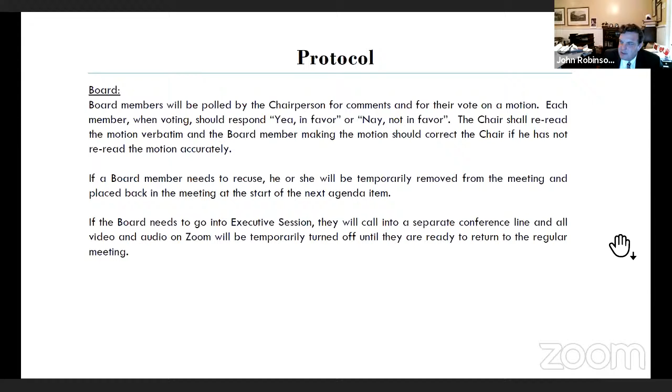Ms. Parish, what is agenda item number 1 this evening? Thank you, Mr. Chair. The first item is the request for the first one-year extension of approval for demolition of a rear warehouse building. This was originally granted on February 26, 2020, and the extension is pursuant to Article 9, Section 54962 of the zoning ordinance. Project is in the Cannonborough-Elliotborough neighborhood and in the Old and Historic District.

Okay, the staff comment. This is a vested right first-year extension requiring automatic board approval if submitted in a timely manner, which is good for 1 year and may be renewed 4 more times in 1-year increments per ordinance section 54962. We recommend approval of a first 1-year extension of the approval for demolition to expire February 26, 2023.

Thank you, Ms. Parish. This one's pretty straightforward. I have a motion from a board member. Move to approve. I'll second that. There's been a motion to approve the 1-year extension in conformity with Article 9, Section 54-962 of the zoning ordinance.

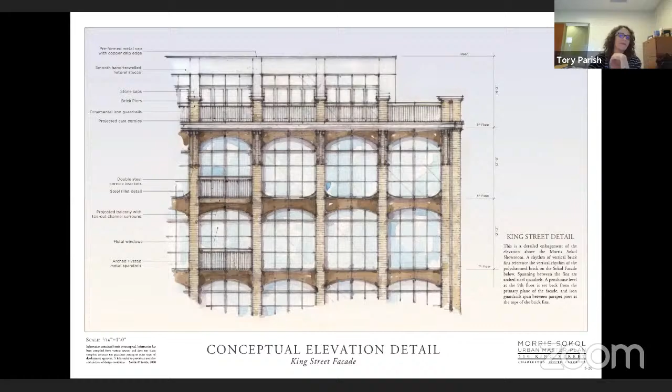Okay, all right, thank you, this is very much vested. Did you get all that? I did. It was quick, but it was very interesting.

All right, this is a vested right, first year extension requiring automatic board approval if submitted in a timely manner, which is good for 1 year and may be renewed 4 more times in 1-year increments per ordinance section 54962. We recommend approval of a first 1-year extension of approval for demolition. I'm going to read this, don't look at the screen. This is approval for a first 1-year extension of the conceptual approval, which will expire on February 26, 2023.

Okay, thank you, and that will be what's in the record written. It's okay, I trust you, and we can certainly correct that in the record. That's fine. Okay, you have heard the position of staff recommendation. Is there a motion and second on this request for an extension?

I'll move to approve the request. Okay, is there a second? I second, this is Leon Scott. Thank you, Mr. Scott. Mr. White.

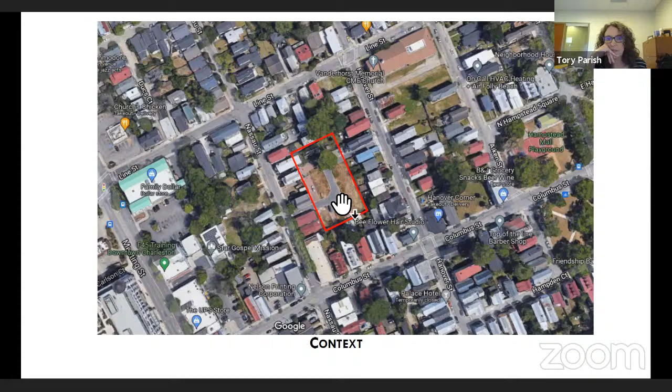Okay, let's see. I think we have.

Mr. Chairman, when this says previously approved designs, what level of approval did it have? Did it have final approval? I would have to look to the staff for that. The note I have is that it was final, but I'll have to ask Ms. Parish. It had preliminary approval. I'm double checking to make sure we put that in correctly. That's right.

So they are now requesting final approval. I elevated Luke. Is he in here? Luke, are you there? Yes, I see him, but he's muted. And now, right, preliminary approval.

Thank you very much, I apologize for having to be added. Just to clarify the previous question from Mr. Metters, these projects were all approved final at staff, which is the approval that lapsed. Just wanted to add that note quickly. They were given preliminary approval by the board with final review by staff. Correct, thank you. And we had completed final staff review on the project.

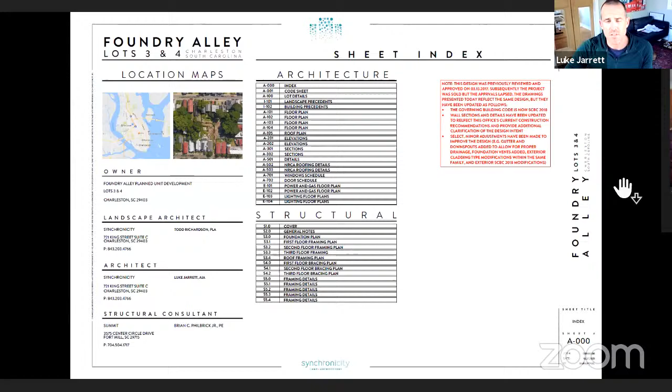So with those items, if we could proceed into the first illustration page of the presentation. Let's see, I believe we have the general stuff. Please keep moving forward. Okay, this is good right here - I'm sorry, if we could go back one.

Thank you. This is just a simple demonstration of some of the precedent imagery we used for the buildings designed within this development. We worked with Julia Martin - she designed some of these, we designed others, and we worked to find styles that were complementary but not too similar. So we have some similar precedent images leaning a bit different in terms of style, a little more of a traditional look. Materials are all largely the same, just used differently.

If we could move forward to the plan of the first one, thank you. So the first one we're talking about is what we call lots 3 and 4. It's an attached single family residence over a property line, with tandem garage parking, front doors, and access to the main living level. The one on the right side, facing the next building over, has a detail that is open and screened with a little porch on the side on the next floors, as you'll see.

If we could skip forward, please. Both residences have their main living areas on this first floor, the conditioned floor above grade. It's pretty straightforward. There's a couple little revision clouds you're going to see through this presentation, and I'll try to illustrate them briefly - these windows were clarified.

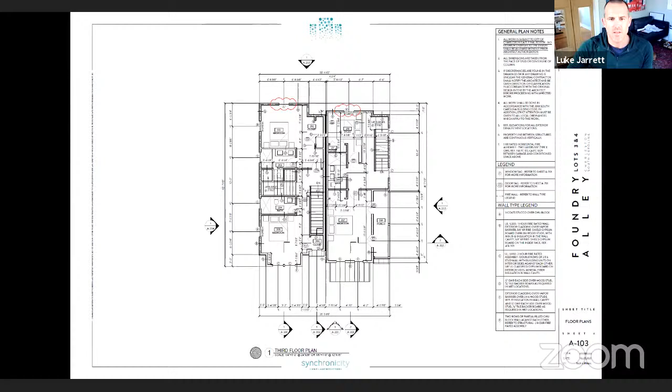If we could go to the next page, please. Thank you. This floor here are primary bedroom floors on both buildings. You'll see that the building on the left is pretty straightforward. On the right, we've got a nice porch on that side off of one bedroom. And then these both return to another floor.

If we could go to the next page, please. Excellent. The structure on the left, the upper floor has a roof terrace, and conditioned space is recessed back from the front of the building. The building on the right is a gable roof, so there's no roof terrace on that one.

Revisions on the building on the left: there was one small window in the area where the bathroom was that we removed, and we simplified one more window on the front for constructability within that bathroom. So there was a reduction of one window on the front and one on the side. We felt that they were better from a constructability standpoint and really not visible from anywhere.

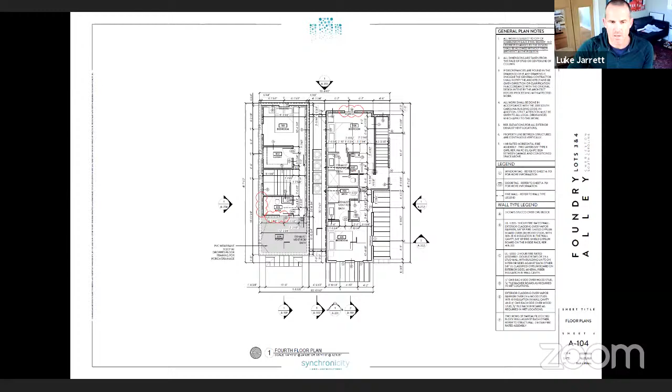We could move to the roof plan. This will just simply demonstrate the general roof configuration: gable to the right, a lowish sloped hip to the left of the roof terrace. We revised the left side of the roof terrace with the new structural engineering design. We had to change some of the slopes for our terrace.

So we added a downspout and a gutter off to the left side there. Previously, that roof drained to that center section and it all ran to the back. So that scupper and downspout on that side are new.

That is very near one of the buildings that Julia has designed. You can see from the site plan as we get to the next one. Minimally visible downspout. And then we revised the scupper at the rear of the structure as well, very slightly. That would be all.

If we could move to elevations, please. Thank you. Excellent. Let's see, could we go, is this the first? So yeah, I'm sorry, I got confused.

I apologize. Some revision cloud where we have added information for engineered flood vents on the side here. They're lined up with the center lines of the windows on this facade.

And then on the right, the west elevation, we had previously, the parapet was detailed with a paneled condition, and there was siding on the top, and we thought it might be a little nicer to change that up. So we have changed the top to a panel up there, fiber cement panel. I believe is that correct? Yeah, Hardie panel cladding. And we could move ahead, please.

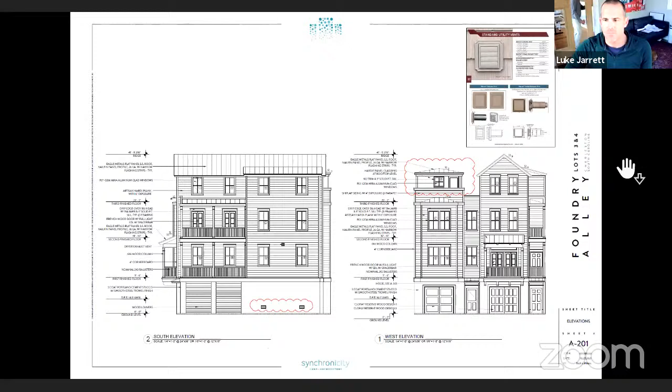The revision cloud across the top demonstrates that we kind of reversed the way that the cladding worked between the parapet and conditioned upper floor. We made some reductions to windows to shorten them up on this second living floor, and we elevated the sill of one of these other windows.

This also shows the downspout that I mentioned coming out of a scupper from the roof terrace, and then some of the foundation flood vents, and then some of the tweaks to the exhaust vents that we have on the rear of the structure to work with the new drainage.

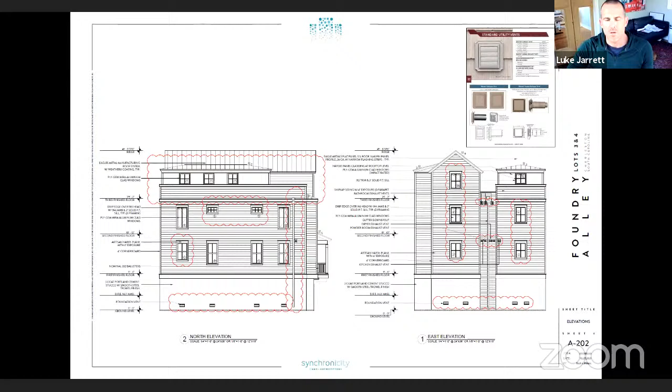The other window revisions on the back were clarifying notes to make sure that it was understood that these were to be casement windows to work for egress. They are in the same window family and profile. We could move forward, please. Thank you. We can move past this.

This demonstrates some of the structural construction revisions. No changes here. If we keep going. Thank you. I think continuing forward.

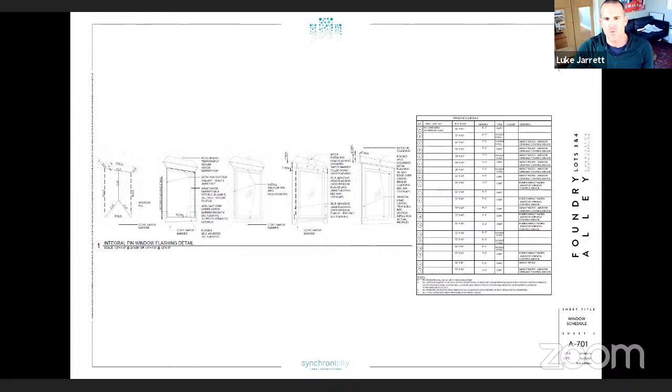Excellent. So this is the building that is to the right of 3 and 4. It's another attached single-family residence. We're calling it 5 and 6. If we could move into the first floor plan, I think the other information is largely the same.

Ground floor, no revisions to this one. This is one of the structures that we would request the board allow us to revise, or authorize staff to decide if that's an appropriate thing for us to do. It's not been requested at this time, but I have a feeling the owner may ask us to do that as well.

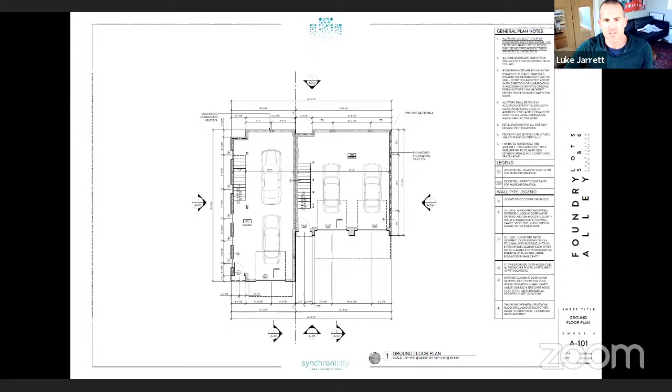Similar program, kitchen living spaces on the main living floors here. The revision clouds around this porch. We made a little bit of a revision to the roof line of this porch here. You'll see in one of the further slides, we can skip ahead. That was shown, and it's still unfortunately not perfectly shown. I believe we revised the roof of that one.

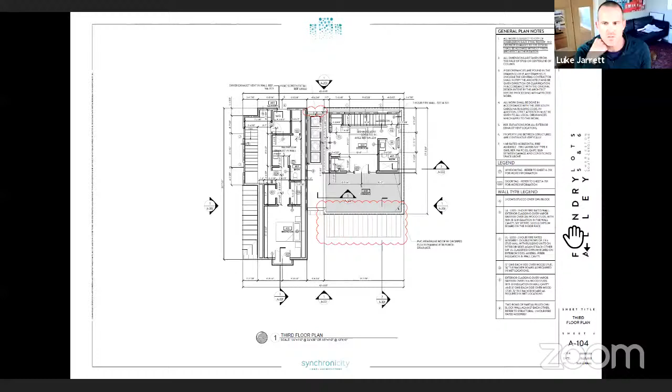I think the elevations may be more effective here. The floor plans in this one are pretty similar to the other one that we just looked at. And if we could move forward to A201s, thank you.

I think the revision cloud that we were looking at was on the wrong roof. I apologize. The roof to the left, the little bay projection on this main living floor - that was revised. That was a shed, I believe. We changed it to a hip for a little bit of variety.

We did a panel switch also on the top floor of this one, basically changing the lap siding to the condition level and moving the panel to the parapet, which we thought was a little nicer. And then the revision clouds around the garage doors, we just changed the graphics to better indicate the two different styles of garage doors that we've specified. So that's really for clarification, drawing improvement. If we could move forward, please.

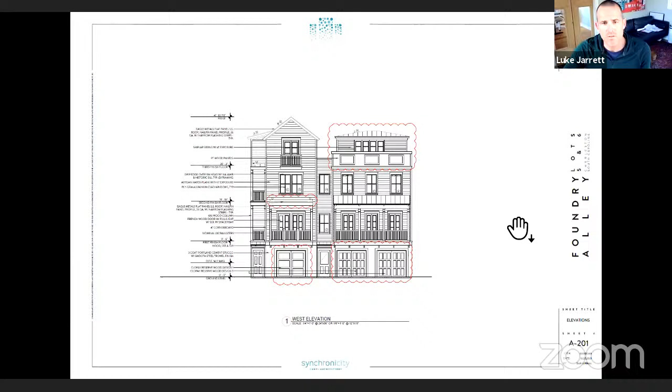This is the side elevations, no major revisions. Continuing forward, please. Drainage revisions to the back, similar as a result of some of the structural redesigns, and then the top floor revision. Move forward, please. This is generally more the same from the other side.

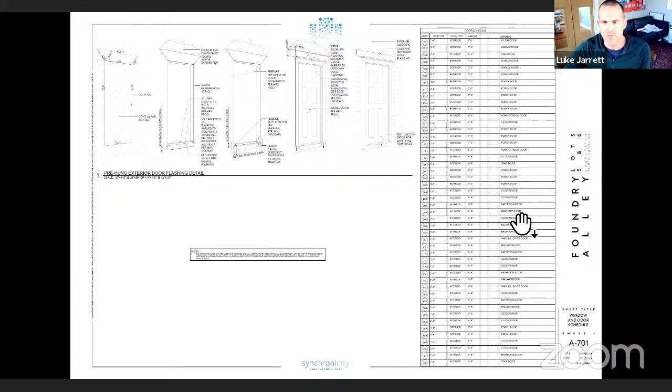That's a scupper though, with the downspout there. That's also in addition as a result of the new structural framing for the roof terrace. And I believe that's all for this one. That's correct. And if we could skip to the first floor plan for what will be next, which is 8 and 9.

Actually, if we could go back, I'm sorry guys. Can we go back to the site plan? I just want to pause for one quick second on the site plan. The orangish color here, the two buildings we're talking about - we're about to talk about the buildings on the other side of 7, which Julia designed, were the two that we just previously talked about. And that's where the garage bay that we may be asking to have double bay is pretty far back out of the way. I just wanted to enumerate that point.

So this one here is my personal favorite out here. These are our workforce units, lots 8 and 9. And we can skip into the floor plans now.

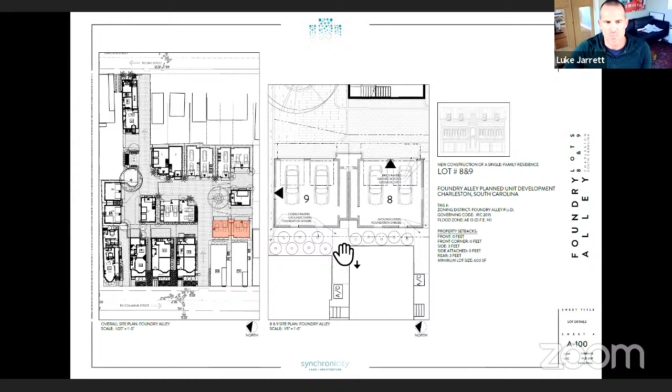These ones both have the single bay garage doors, which again we're going to be asking the board to allow us to potentially revise with staff approval. And then to the left, you can see revision clouds around these other porches on the main living floor. We had to shorten the porch a little less than a foot to coordinate with some of the requirements for the new structural drawings. No revisions to the details or any of the other things, they're just a little shorter in the left-right direction. If we could move forward.

Thank you. These just demonstrate that change has been made there as well. These are kind of cute little houses, I love them. And sorry, one more slide forward.

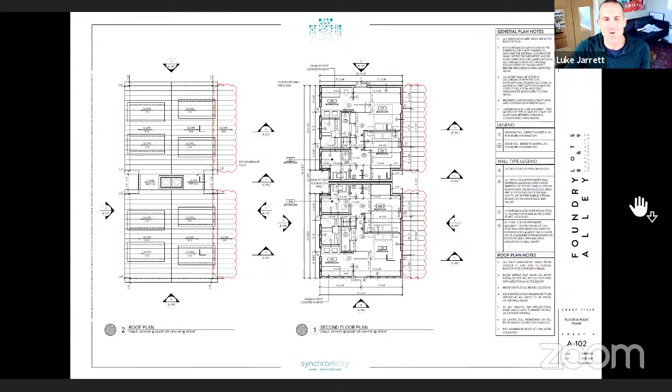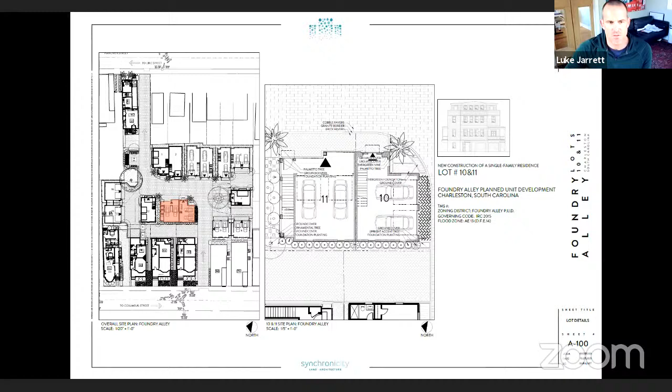If we could move forward to the first floor plan, please. This one has a double loaded garage in both conditions as well. I don't think it would be reasonable to make a revision to either of these to a double door. The one facing plan left is along the main drive coming in, and I think the profiles of these double or single doors would be much nicer, so we wouldn't be asking for a garage revision here.

The 2-car garage is on the first floor. If we could go to the next plan, please.

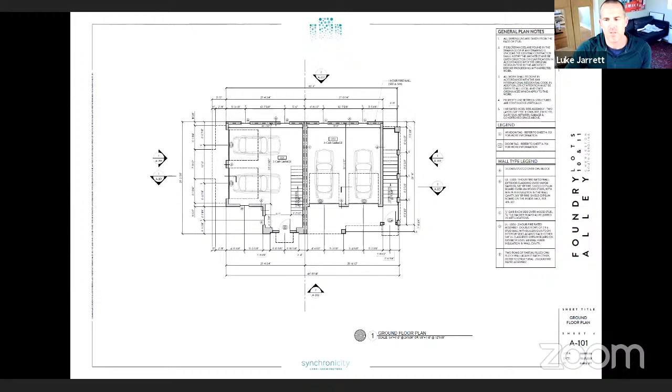So the porch revisions here - the center of the porch is the same depth it originally was. But since we had to shorten the porch where the road undercut us a little bit, we stepped back the top and bottom bays of the porch slightly to get out of the right-of-way. The one plan north we did just to give it a little symmetry, since that's a pretty symmetrical side. Not a major revision, but that was the biggest design change of this one.

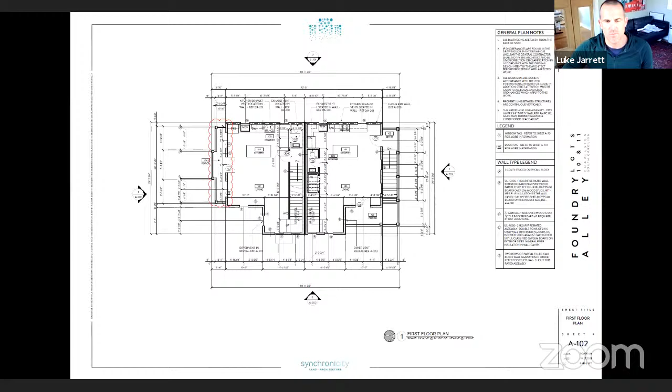If we could move forward, please. You'll see that as opposed to a simple hip roof, we have a bit of a jog in the center to account for the extra depth of the porch. Move forward, please.

This building has roof terraces on both sides as well, although we were able to maintain the framing for this one. I don't think there's any changes to the parapets here.

One more, please, into the elevations. So we're indicating revisions to the porch, clarification of the patterns on the garage doors, and on the upper floor we originally had a panel cladding, and we thought it was a little nicer to use a Hardie plank 4-inch exposure - so it's a slightly different cladding than before, which I believe was a panel.

If we could skip forward, please. I believe that's the conclusion - the last one we had. I think this is the final elevation slide. And that will conclude our presentation.

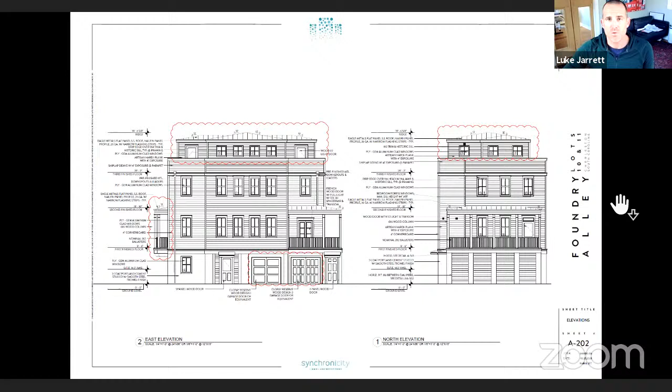We'll be happy to receive questions. Thank you very much. Thank you, Mr. Jarrett. We will now move to...

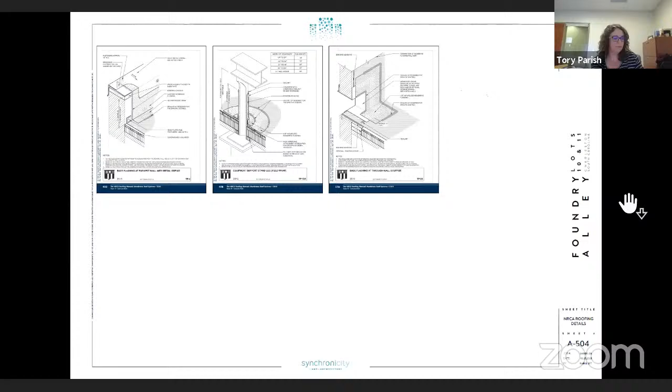Do you have any public comment on this agenda item? I don't think so. We do not. Wasn't expecting any. So, city staff comments and recommendations.

The proposal utilizes a hybrid approach of Eagle Metal's standing seam metal roof with 1-inch seams and hand crimped ridges. This method seems permissible as long as the joints are tight and the seams are minimized. While the railing might meet code, a slight tightening of pickets could be more visually appropriate.

Civil drawings to be reviewed separately for the overall project. Site work should be deferred until that time. A color palette for the entire PUD needs to be submitted and reviewed. The final permit drawings with revisions have been reviewed by staff.

Garage doors should be one consistent type on each building. And as Ms. Martin concluded, one door where possible is more functionally appropriate in the more minimally visible locations.

Let me know if you want to go back to this detail, we can look at it. Number 7: at the wall sections through the porches, there's a second layer of framing and trim that is not articulated on the elevations. Typically the elevations indicate a cantilevered structural element or bracket with a chamfered profile instead. Revise these details to match the elevations.

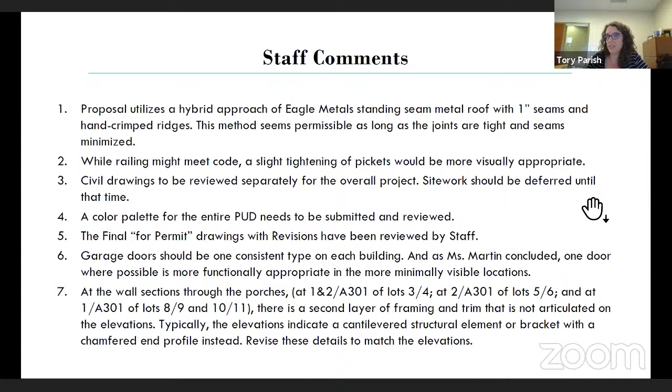Number 8: windows are called out as Ply Gem Mira, although the applicant has indicated a willingness to match windows used in Ms. Martin's projects - the rated Sierra Pacific Feel-Safe aluminum clad wood - to promote continuity across the overall project.

And 9 through 12, I have page numbers if we want to go back and look at these: at lots 3 and 4, revise window type S to a 2 or 3 light for consistency with others. Number 10, at lots 5 and 6, revise the panels at the balcony wall of unit 6 to better relate to the proportions of the building, and use a pitched roof at the first floor balcony of lot 5.

Number 11: at lots 8 and 9, lower the HVAC platform and associated screening as much as possible. Number 12: at lots 10 and 11, add the missing pilaster to the first floor porch plan of lot 11. Final staff recommendation is final approval with board and staff comments.

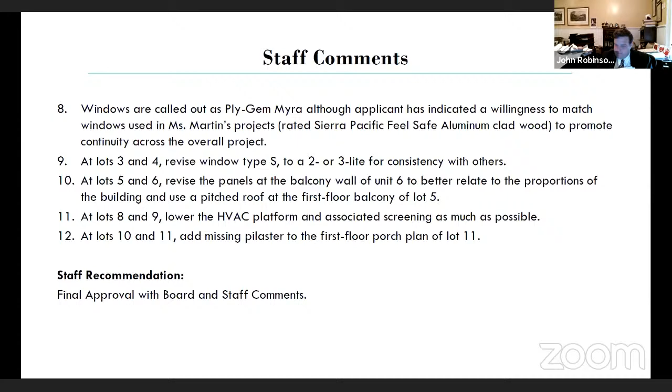Thank you very much. Mr. Jarrett, you have the opportunity to respond or clarify if you choose, with a 5-minute limit. It's up to you. No, thank you. Thank you very much. Okay, great, sounds like we're getting on the same page.

All right, board comments and a potential board vote. I'll jump in and quickly say that I agree with staff's comments and recommendations. And I would second them. It sounds like Mr. Jarrett's moving in that direction, and that everything staff requested is reasonable, maybe just some things lost in due diligence. This was a stale project that we're rebooting.

Mr. Chairman, I reviewed this and it seemed like it could have been in a better situation when it got submitted for this final approval. There were a lot of things that when Luke was going through it, we didn't get to this or that. I think he should get to it before it's turned in, even though the details staff seem fine with me. That's my comment.

Understood, and it's just handing over a project from one person to another. As we've seen with other projects, these things happen. I think Mr. Jarrett's tried to get it straightened out, and we'll work with staff to finish getting it straightened out. Further board comments?

This is Leon. Yep, go ahead. I'm comfortable with the board and staff. Anything further from the board, or can I entertain a motion?

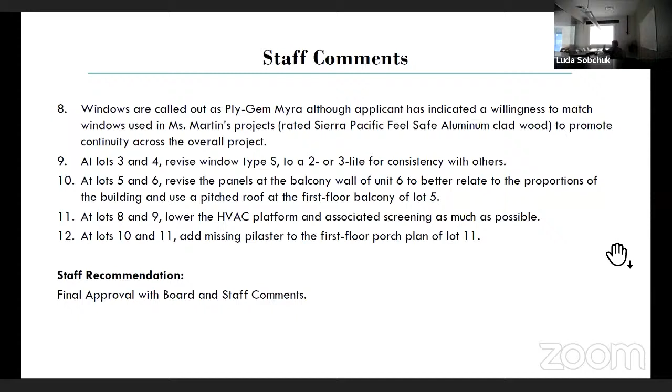All right, thank you very much. Thank you to our applicant. Please closely work with staff on those outstanding items.

Ms. Parish, agenda item number 5. Number 5 is 102 President Street. It's the final approval for new construction, a 7-story mixed-use student housing development, in the Cannonborough-Elliotborough Neighborhood, Height District 5, Old City District.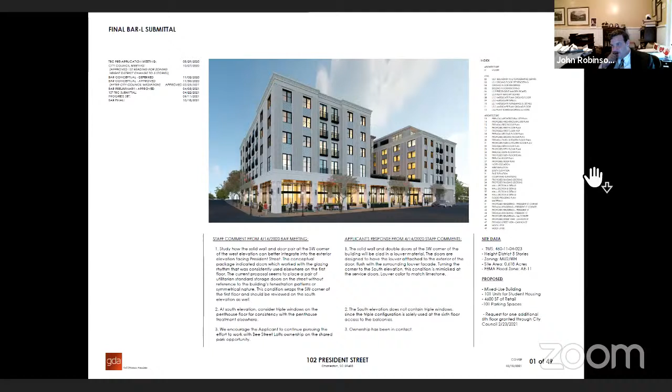All right, we have Mr. I'm going to do some promotion to panelists here. Tony, can you hear us? Can you hear me now? I can hear you now, Mr. Giuliani, you have the floor. Yeah, so my screen just jumped. Am I in presentation now? I have control. You are live and you are with us, and Mr. Courtney has your plans pulled up in front of us.

Also on the line we have Greg Dillon, the owner/developer, Mike Cottrell with Seamon Whiteside. This also should be in here. And then inside the office here, Clark Batchelder.

So this 102 President Street was last seen when we received preliminary approval on April 14th, 2021. At the last meeting, there were board comments about paying attention to some details for staff. One was about the solid wall in the southwest corner of the building, where the transformer room is and the entry to the garage. More detail on that when we get to the elevations.

Item number 2 was that the south elevation consider triple windows. The north elevation also has triple windows, but that has a door in it, and it's stepped back, so we felt that was appropriate. But on the south elevation, which is flush with the lower floors, and because of the configuration of the units, the windows would have landed on a demising wall. So we didn't feel it was appropriate given the elevation was flush, plus the configuration of the building.

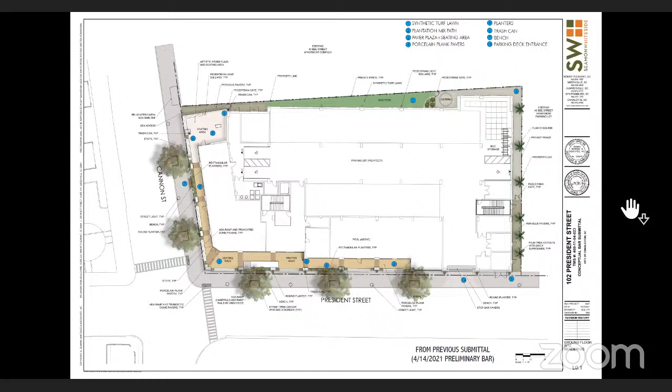If you can move to the next slide, please. By the way, none of the basic aesthetics, layout, or anything else have changed on this plan since the last submittal.

Next slide. In this slide you can see the rooftop pool, on the second level, a fairly small pool that'll service the building, with a grill station to the left and plantings along the edges of the space.

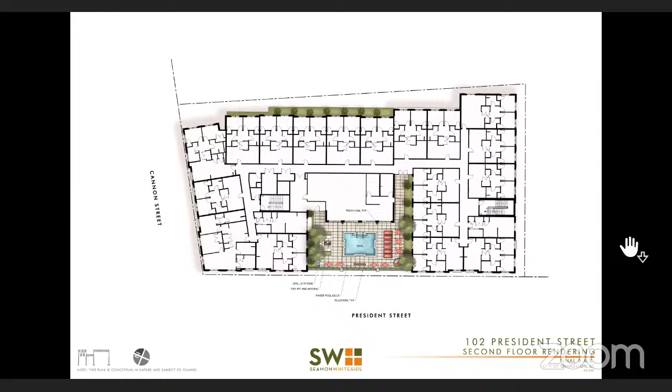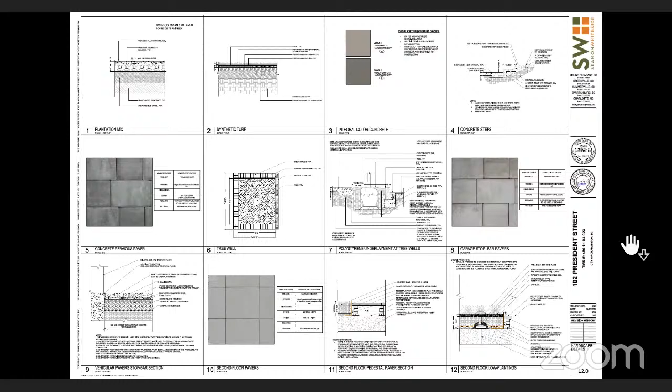All right, so Lawrence, can you jump to page 16 of 49? It's just jumping over all these details. Yeah, sorry, I went through that as fast as I could for you guys. Oh, that's good, thank you.

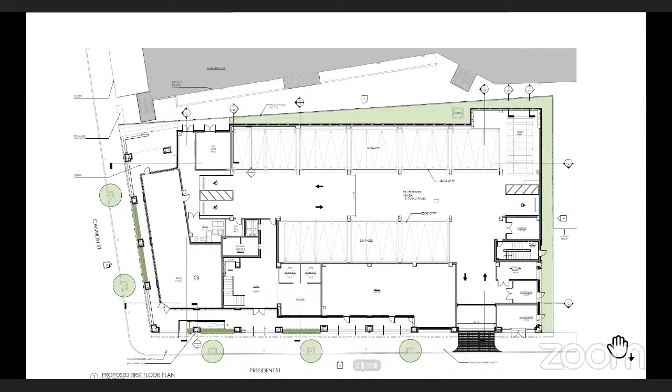On page 17, this is the reflected ceiling plan. I think the last time we met, we had pendant lights and wood ceilings. Now, because we had the limestone and limestone detailing, we created this coffered ceiling and put in can lights that are going to be on dimmers. During the pre-leasing process, we're finding more interest in the medical field than restaurants, so we want to accommodate both. We still have seating out there, still have lighting that would meet, so we changed that a little bit.

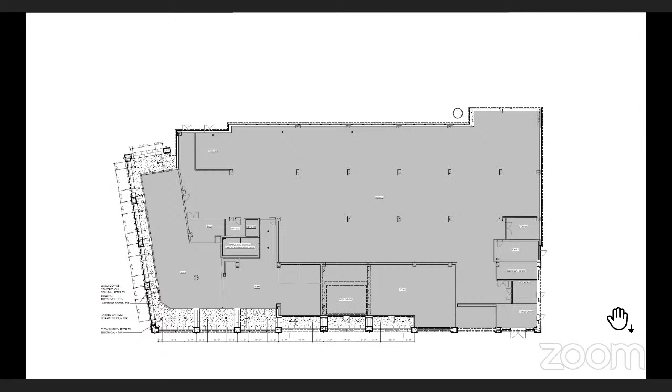All right, Lawrence, if you can jump to page 27, which is the roof plan. Unless anybody has comments about the floor plans, they have not changed since our last submittal.

On the roof plan, we're showing the screening around mechanical equipment. We're proposing to provide the structure to install the screening, but if it's not visible from the right of way, we'd like to not install it.

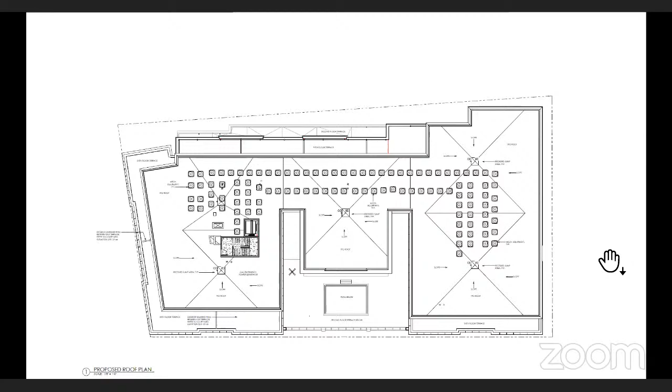If you go to the next sheet, Lawrence, and do a fit, you'll see a diagram at the top of the page showing the sight lines. I don't know if you can do a fit, but zoom out a little bit. At the top of the page—I'm sorry, it's on page 28, my fault. Next page, yeah, sorry about that.

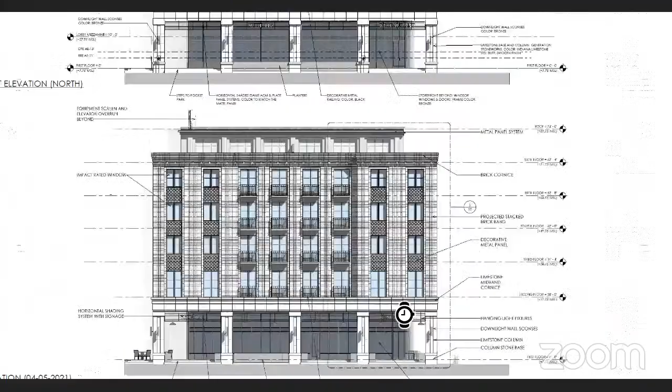When we get to the wall sections, I'll go through the details even more, but right now you can see the previous—the top was just so heavy and cumbersome, and same with the lower one. The proportions were a little different. In the proposed, right above the column capitals, we adjusted that lower line in the limestone so it provided more relief, and we'll show that in the details as well when we get back to the next page. But at the top of the building, we simplified the cornice detail, and then we're proposing to use GFRC at the very top.

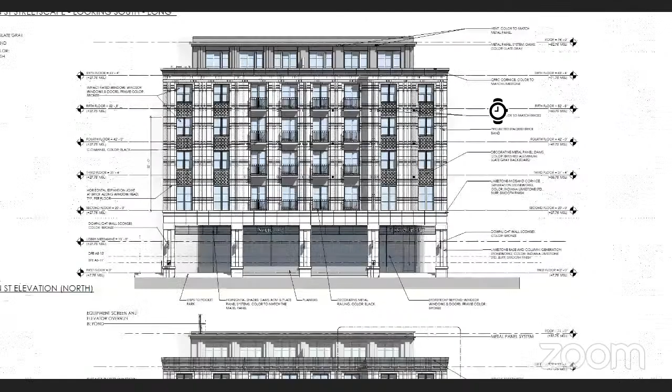So one is GFRC, the other is FRP. We would prefer to use the FRP, but we're showing right now the GFRC—that's the detailing we started out with. But as you know, GFRC has its limitations in delivery, whereas the FRP has the same look, same feel, same texture. It's just, again, it's 63 feet in the air, so it'll have the same look, same color as the limestone. If you go to the next sheet, page 29.

So again, like I said, we carried the cornice details around to the south elevation, which is President Street. Lawrence, if you can zoom in on that corner where the hand is.

So this is the previous design where we had window, the garage door, and limestone design. Of course, if you can pan up so we can see the proposed.

On the proposed, for the curtain wall we pushed it back into the wall, and then continued the screening, the sunshade louvers up above all the way across the 3 bays. We pushed the garage door back. DOT had some concerns with stacking, so we were able to push the entry door about 20 feet back, so that gave plenty of room for stacking and getting out of the building.

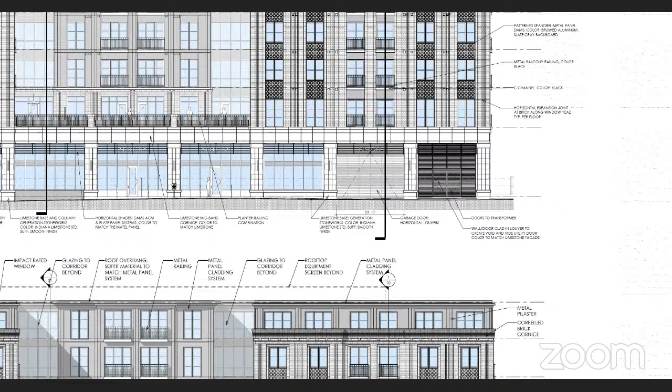And then on the transformer room, we're providing the louvers that are also being used on the other side of the building, at the garage, to cover up the doors, so we're able to mount them onto the doors. If you can just pan out just a little bit, you can see the rest of the elevations.

Again, like I said, the top of cornice details changed. But as far as all the window details with the aluminum below the windows, those details remain the same. And then we have more details of separation when we get through to the wall sections, I'll point those out.

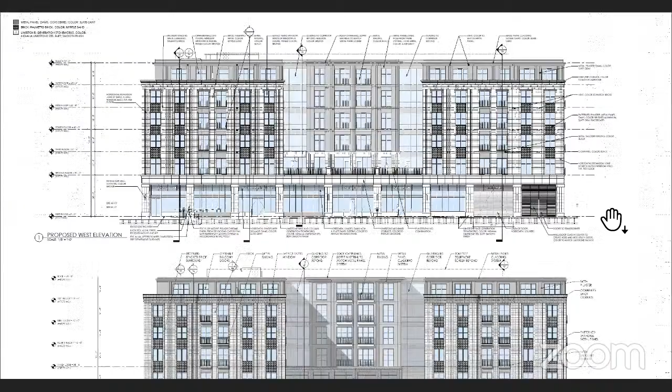Go to next sheet, please. South elevation, and on the previous you can see where we had the limestone. We turn around, we still have limestone, but where the doors were we added the louvers to cover up the doors and give it the impression that we had louvers leading into the transformer room.

And the previous louvers, because of the cornice detail, if you can see the proposed cornice detail at the second floor, we're proposing to simplify that even much more than what was below. We still have some cornice brick corbelling going on, but the top course would be the GFRC. By simplifying that, it made those proportions taller, so it matched what was happening around the front and to the left there. So it made those two balanced.

And if you look at the very top, the 6th floor, where we left the double windows, like I said, it continued that path all the way up. If we would have made those triple windows, it would have offset that balance, because this floor at this point is not pushed back, it's flush with the other floors.

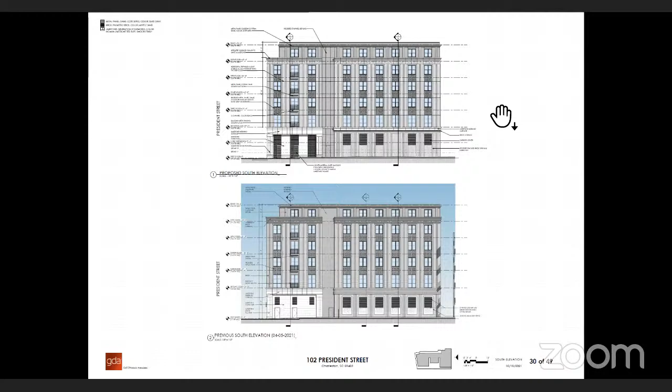All right, next page please. On the east elevation, we did the same application for the lower floor, the garage, where we made it look taller, simplified the cornice detail of the second floor. And then the cornice of the fourth floor and everything else pretty much stayed the same.

Next page please. These elevations weren't in our previous submittal, we just submitted them in. This is at the second floor courtyard where the pool is. They weren't in our previous submittal, we just added them in. As you can see, we just carried the details around into the courtyard area.

Now, Lawrence, if you can jump to page 35. In the right hand or left hand corner, you see the 3D section of a typical column detail out front on President Street. And in the back, you can see we have a curtain wall system, not a storefront. Unfortunately, because we're close to 19 feet tall with our curtain wall, because of impact rating, it had to be a curtain wall system. It was too tall for the storefront.

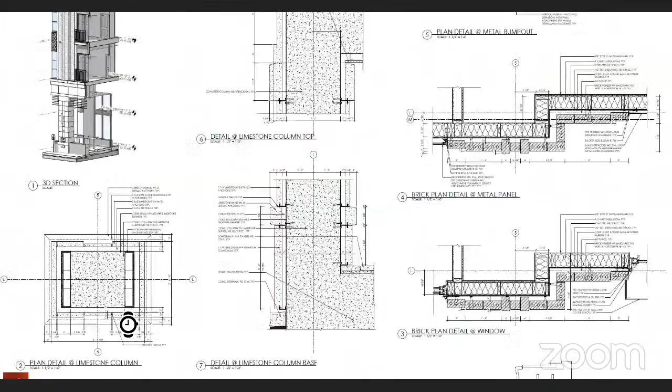So below the curtain wall, we have limestone panels as well. Then at detail number 2 is the plan detail at the base of the column. I don't know if you can zoom in on that for me, Lawrence. You have that, or 7 - you don't, yeah, perfect. As you can see...

At the base where we meet the sidewalk, we have 3.5 or 3.25 inch thick limestone, which is very similar to the project at King and Spring Street. But we kept it off about 1 inch, because as you know, limestone likes to wick water, so we couldn't take it down any further, couldn't take it below grade. Even though the manufacturer said this is still too close, they'll still warranty the product. We may end up with some staining, but we like the detail and it'll follow the sidewalk.

We made the sidewalk on this side dead level, and then the crosswalk slopes because there's a 3-foot drop from the south to the north. But at the back of the sidewalk it's all the same elevation, so we're going to keep that, that'll be a straight line. We want to keep that consistent all the way down. And as you get above the water table course, you'll see that we drop back to 2.25 inch limestone.

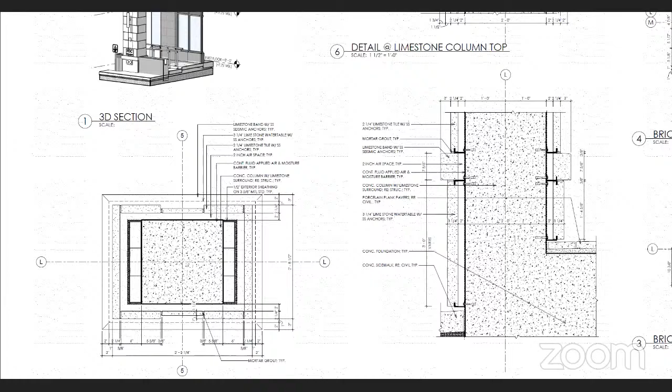If you can pan up to detail 6, you can see that 1 foot floor dimension is the top of the column, that's the column cap. Right above it is that 8-inch detail I was explaining before. We added this little relief here deeper, and it helped break up our cornice detail. The overall height is still the same, but we basically added another detail element there.

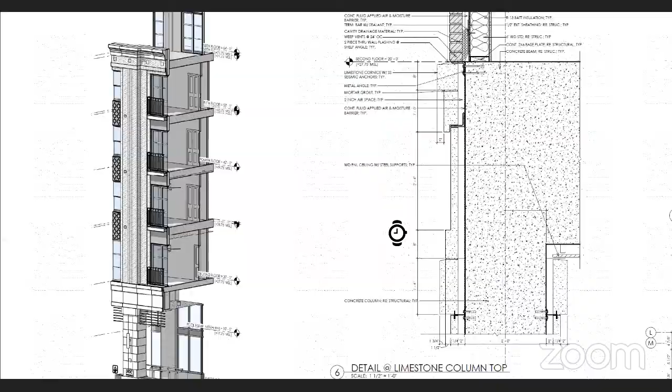If we can continue on the next sheet, please, go to the next sheet.

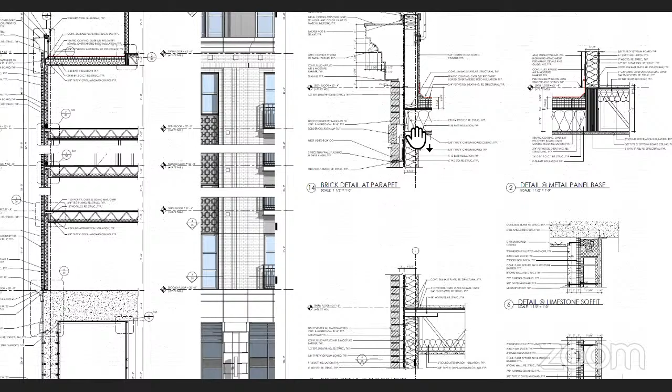You can see as you go up the building, we're at the column in between the brick relief, brick details. We're showing the soldier course, and as you get to the top, you see the GFRC location, which again we're asking for FRP if it's acceptable by the board.

If you look just slightly to the left there, you'll see there's a soldier right above the stack bonding above the window. Previously we had this dentil molding, so we still have it in a sense, but we made it flush with the brick, so it's in with the running bond that's happening there. So that's no longer protruding, it'll be flush.

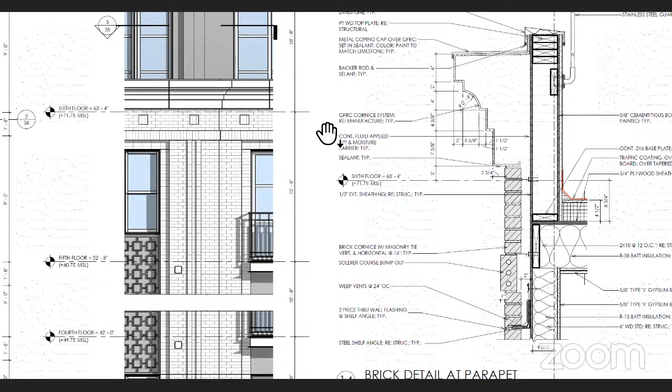Then if you go to the next sheet. So these are the details along the south elevation. Again, you can see the brick goes down to the base, so we'll take that below grade. It's acceptable, of course, by flashing above.

Then the cornice details, how we simplified those and how that was incorporated. And of course, at the top of the building, where we step back in the 6th floor, we have metal panels. We have the details of how it's handled, all the articulation at that point.

Next sheet, please. All right, so this is our east elevation. On this sheet, again, the cornice details are the same, but I wanted to point out as far as the metal panels and details, Lawrence, I think if you go to the next sheet, there are continuation of those. Oh, it's not there.

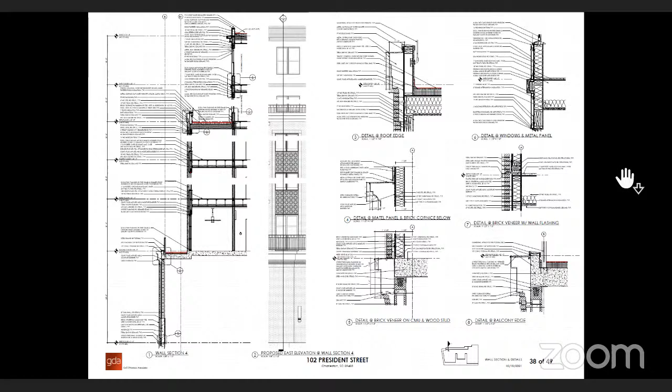We have that detail. Oh, I'm sorry, go back to page 37. So if you zoom in on detail number 10, right there, that's it. So detail 10, this is like I said, below the windows. So we're showing a metal panel, and then we have this another decorative piece that's going to be laser cut in front of it.

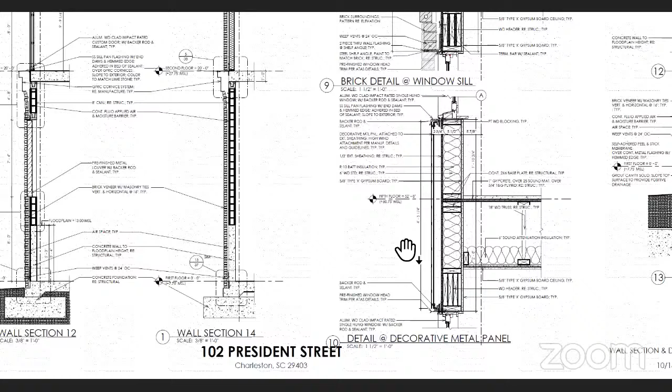Right now, we're showing about a 1/2 inch relief of it, to create the shadow. That's one thing we want to play with once the mock-up is built. We'll put this on the mock-up. I want to play with that 3/8 of an inch gap for our shadow to see the type of shadow that we can get with it. So that's going to be a mock-up. But right now, we're showing that to be 3/8 to a 1/2 inch deep. It's all bolted together.

So if we can jump to sheet 39. Because we are in AE10 elevation, we have to flood-proof the entire building. We have stacked parking where the parking is being floor stacked, and it goes 9 feet below finish grade, finish elevation, finish floor elevation. So as you can see where they have a dashed line in the sidewalk underneath the main entry there, where they have

entered into the building. Move your hand up a little bit, Lawrence. Right, yeah, so you see the dashed line right below his hand. So we're putting it basically in the middle of the sidewalk. You'll see the little screw heads in the sidewalk, but it wraps all the way around the building, and all the other walls will be flood-proofed. Right now, we're proposing Xypex, waterproof concrete.

At the garage door entry, we're going to put the flood panels behind the little precast columns, or limestone columns there. Then for the transformer room, right now it shows the waterproofing on the inside of the building. That's not true, it's on the outside. It's in the wrong location.

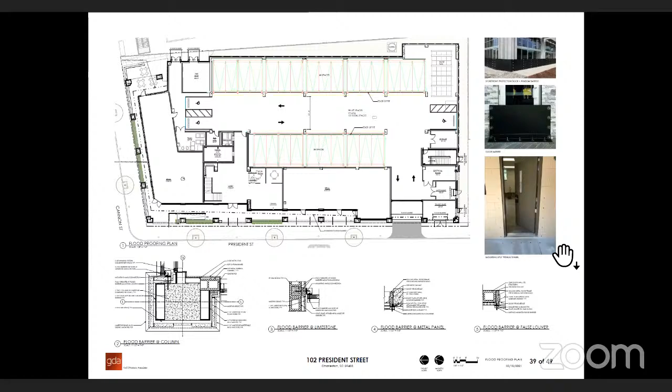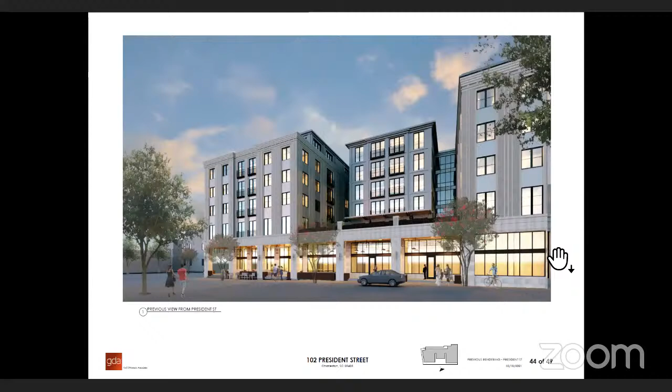As you can see at the top, the cornice details. If you flip to page 42, you'll see the previous, and as you can see, the detailing just got a lot simpler. Next page, please.

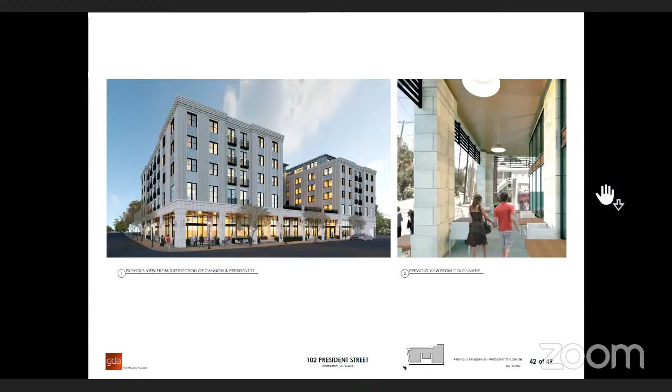So 43, just another view. This is proposed, and then previous is on the next sheet.

The only thing I've left is the colors. The colors are pretty much the same that we proposed. Lawrence, can you go back one page please, to 43? So the brick we're proposing is a palmetto brick, which is a myrtle sand.

It's like an earth tone base color, but it has a white coating on it. The limestone is a buff smooth. All the aluminum curtain wall framing is to be bronze.

Right now you'll see the planters, showing planters at the stairwells. We're proposing those to be bronze as well.

The metal panels on the building below the windows are going to be slate gray. The storefront at the top will also be bronze, and the windows will be bronze as well. The balcony railings will be black.

And that's it. Take any questions? All right.

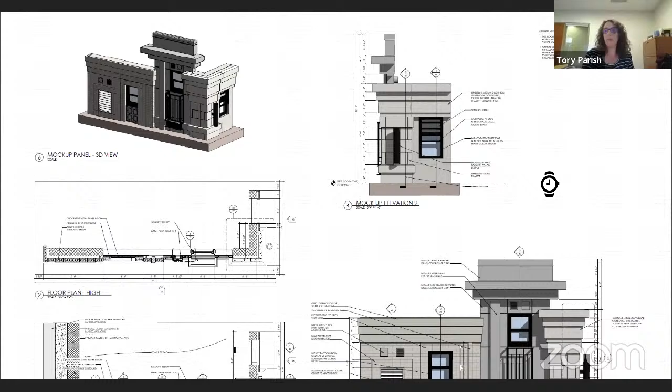Wow, are they not in there? Well, they don't appear to be. Okay, well, I've got a couple of options. I can pull them up on my screen so everybody can see them, or I can read them and show them.

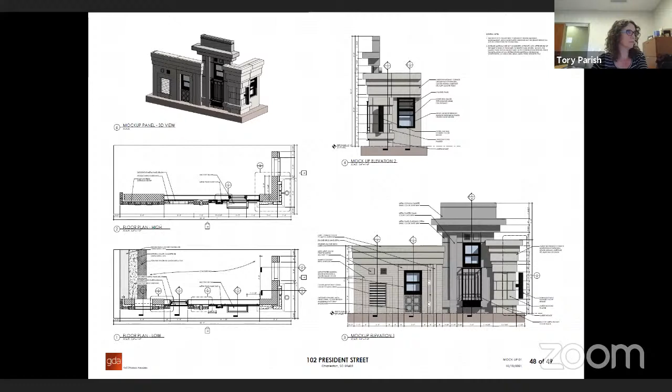Okay, let me see if I can share my screen. Lawrence, I'll have to— Well, maybe instead of sharing screen and swapping around technology, Lawrence could get you to a sheet that would demonstrate what you want to show us, particularly in the garage. Would that be okay? That'd be fine, that way I don't have to worry about page numbers, screens, and having some technical breakdown or issue.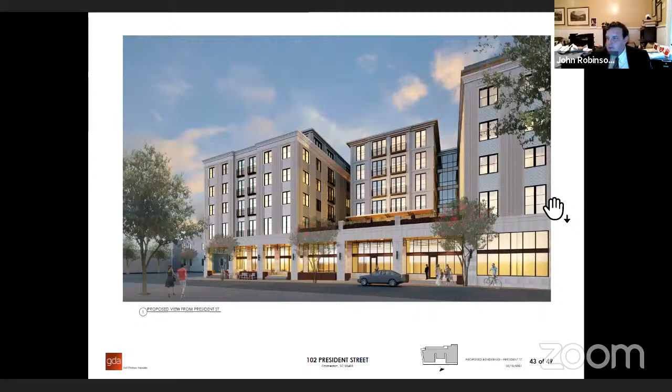All right, Lawrence, if you want to go to the President Street elevation. There we go, right there. Okay, comment number 1: the garage door width on President Street has widened from 18 feet to 20 feet, you'll see that on the top part of the page, per DOT standards.

Accordingly, the pilasters on either side of the garage opening have been shifted over. This change is not filtered up throughout the elevation. While not ideal, this seems to get lost on the elevation and will rarely be viewed from a straight-on perspective.

Okay, the second comment is way up in the landscape package on page L2.1. On the bottom left, detail number 9, the wood slat fence. The horizontal slat fence, which will be visible from the east and south corridors behind the building, and as depicted in detail 9, 2.1, is not appropriate for downtown and should be replaced with the typical double-sided 6-foot urban privacy fence.

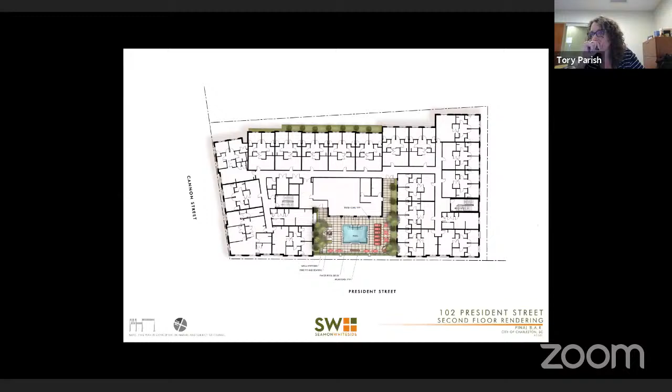And I can show you where that is if you want to go to the site plan. Okay. Maybe go one more, I think it's in the actual architecturals. You can see the fence line, but let's go on. Okay, here we go.

Back up one slide if you don't mind. Sorry. Okay, right here, if you look at the top left, you'll see the gate in the dark gray hardscape section. Right there, yeah, so the fence starts here and then goes to the property line and wraps the east property line, comes down the south property line, and you'll see the other gate right there at the first tree. So we feel like there's still visibility to that, and that should be the typical urban standard.

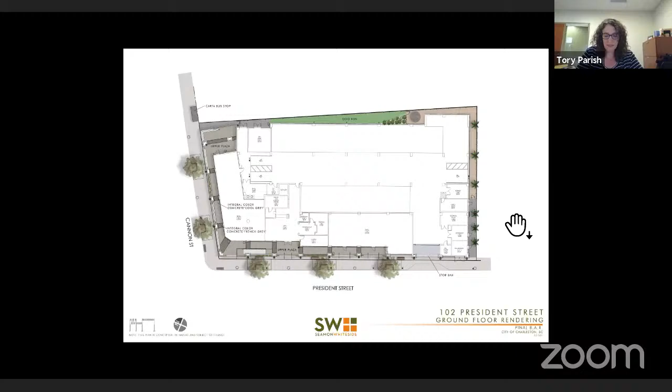Number 3, the cornices. The cornices, which were previously corbelled brick, are now proposed in GFRC. It should be noted for clarity that these are detailed on pages 35 through 38, but are not updated on all elevations and renderings. Therefore, for purposes of discussing the details, we're looking at pages 35 through 38.

Number 4, if you want to go to page 36. Provide a section through the storefront in addition to wall section A36. Down here at the bottom left, you get a hint of the base underneath the storefront, indicating limestone is on the exterior. I would prefer to have a blow up of that entire storefront at the ground plane.

Number 5, louvers are to be consistent in their appearance and trim. This is related to the louvers that have been added to the elevation at the top of the base ground floor openings. We just want to see consistency all the way across, even to the louvers in that last bay that's utilitarian.

Number 6, this was just discussed. There's now no mechanical screening on the roof. The applicant is cautioned that any visible mechanical equipment will have to be screened.

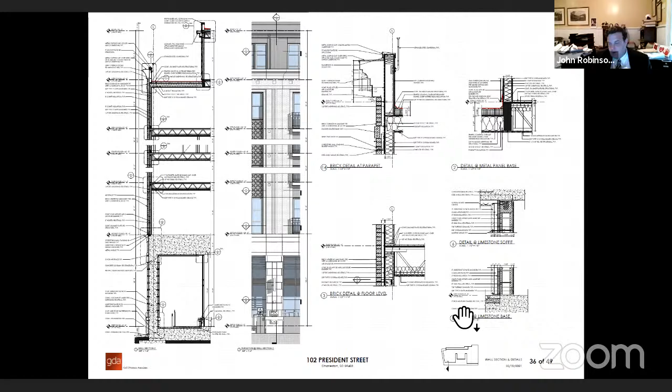Thank you, Ms. Parish, and you did a great job bouncing back and forth with Lawrence. Apologies for that. No, you owe no apologies, you got a lot going on. We could follow you exactly, we followed your comments and Lawrence guided us through the slides. It is just fine.

The applicant may avail themselves of a 5-minute period to reply only if they feel it necessary.

No, we agree with her comments, we see no objection, we can certainly work with those. Excellent, that's what we love to hear, that's great. Thank you for that from the applicant.

Having closed the rebuttal period, do any of my fellow board members have any comments on this agenda item? Mr. Chairman, I'll start if that's okay. Yes sir, please. I support Tory's comments.

Second, I believe the HVAC screening should be installed. I understand it's not visible, it's not required, but I think it should be installed.

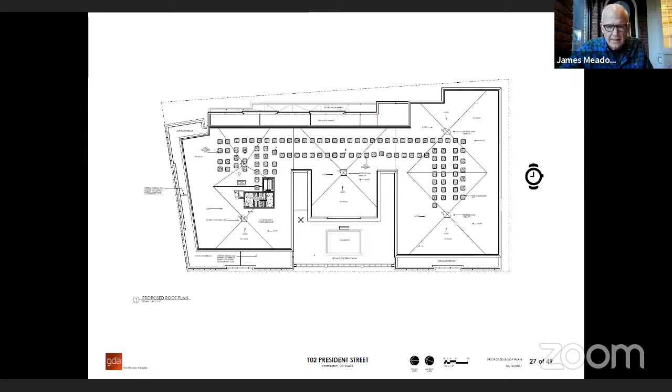Utility doors on the east elevation, Lawrence. That may be it right there. I can't tell, there were two doors, I think they were on the east elevation close to the corner, and they stood out to me just because they were the only very plain doors.

The trash, yeah, the east elevation, right, just the utility doors down towards the north side. I realize that may be minimally visible from the street, but it's certainly going to be visible for some of your neighbors, and that's a real plain part of that side of the building. So dressing those up with color or texture or something to make them blend in a little better.

Sheet 30. The metal and limestone is, I mean, I'm assuming that, I may have written down the wrong one.

Yeah, you see that there are two plain doors there. It looks like vents above those, and then there's a blank space, and a column off to the right and a column off to the left. I just couldn't tell when I was looking on the computer earlier whether those also are in alignment with the details above. I assume they will be, but I'm just making that as a comment. I couldn't tell.

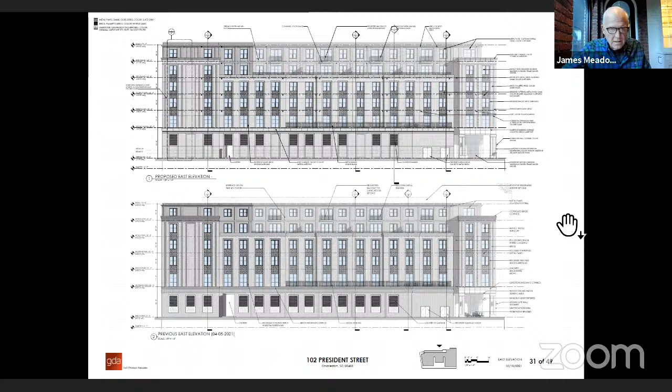Yeah, so I wrote down the wrong sheet earlier. Tony, I'm thinking about the angle irons and the structural, how those extend out for the balconies or other angle irons used to support the limestone. There was discussion about whether that may be subject to water sometime in the future. So anything subject to possible water contact, hopefully those angle irons or fasteners would be some type of stainless steel or non-ferrous metal.

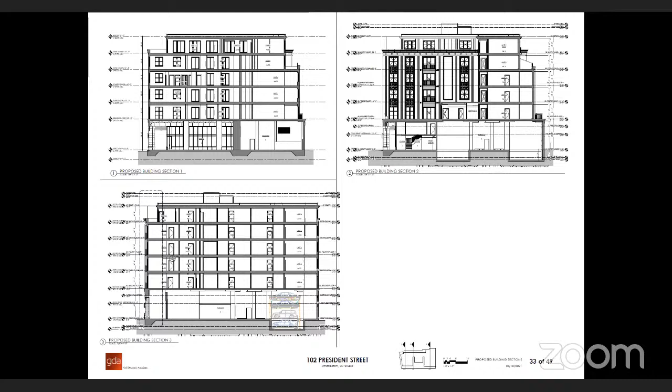Again, the flashing detail on the balcony rails or balcony supports. And then as far as the flood mitigation, where it's anchored into the ground or the sidewalk, I get that. But if there was a way for that to be anchored to the inside jambs of the openings rather than the face of the buildings, I think that'd be preferable, so they're not so visible. They're tucked behind, not visible from the street. I'm talking about the holes on the drawing I looked at. You could see where the fasteners would go in, looked like there were corresponding holes in the side of the building.

Yeah, I'll take a look. All right, okay, thanks, man. That's all I have. Thank you, Mr. Meadows, for those comments. Other board comments?

Well, I'll say that I appreciate James's thorough review, and because of that, I don't have to say a word other than to voice support for his comments and those of staff. Ditto. Any other board comments?

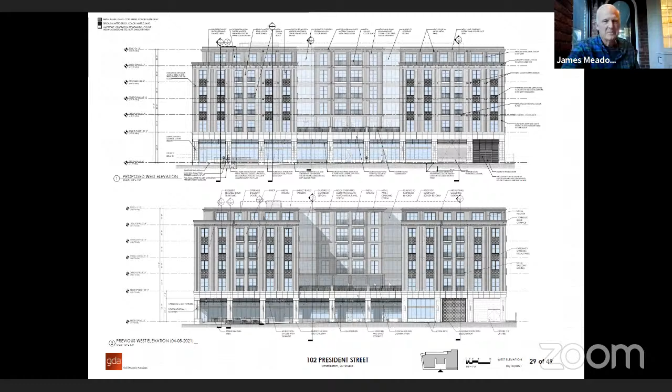Mr. Chairman, that's not eliminating the agenda cap every month, is it? No, that was just for the month, to justify not having two meetings around the holiday schedule, acknowledging that because we have many applicants, that's going to be a long night. Worth it. It's worth the trade. Agreed, just wanted to confirm, sorry. Yeah, no, my service on this board in part is conditional on having an agenda cap normally, but no, that's great. You guys, the veterans who did this till 2 a.m., y'all are just better people than I am. I'm not going to make that a regular thing unless we have to.